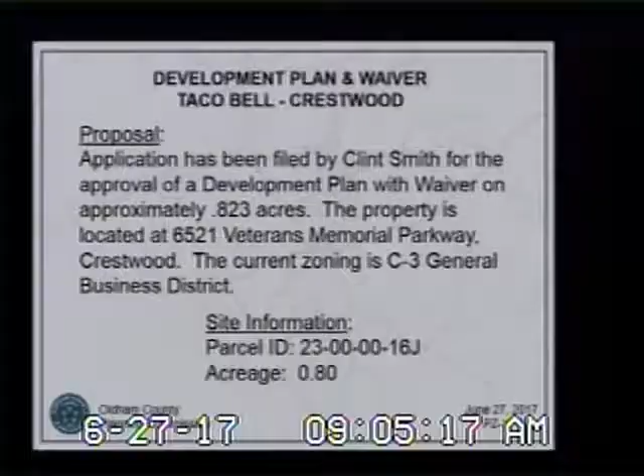I will. Good morning, Amy Alvey with Oldham County Planning and Development Services. As Ms. Fox stated, this is an application for a development plan with waiver on approximately .823 acres in Crestwood. This is an aerial photo of the property. This is the existing Walmart here. This is the existing medical facility that is there off of Veterans Memorial Parkway.

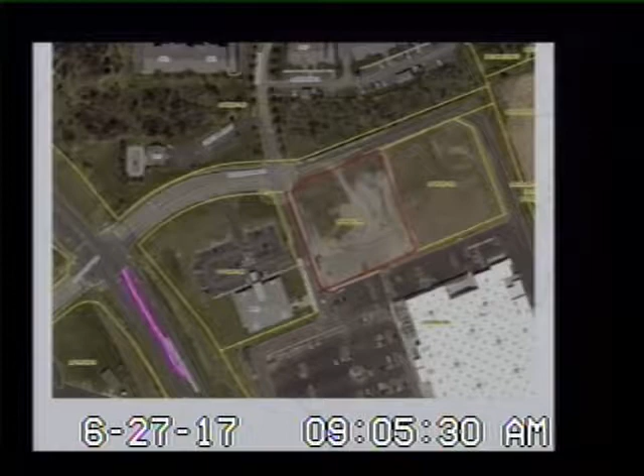History of this entire property. In November of 1989, the Planning Commission approved a zoning map amendment to C1, C2, C3, C4, as well as a preliminary subdivision plan for a development plan known as Cedar Springs, which included this site. That was docket number 1635.

Then in February of 2000, the Planning Commission approved a preliminary subdivision plan and development plan known as Oldham Farms, which also included this site, which was docket number 3126. Most recently, in February of 2014, the Planning Commission approved docket PZ 14-003.

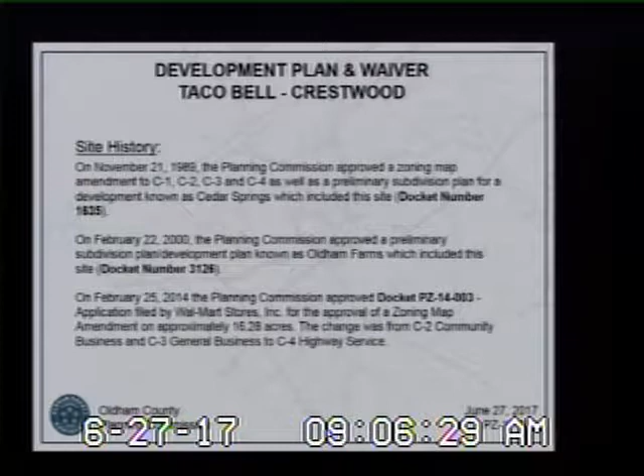This was an application by Walmart stores for the approval of a zoning map amendment on the 16.28 acres. And the change was from C2 Community Business and C3 General Business to C4 Highway Service District. That plan included the Walmart site and 2 outlots. And this docket is the subject of one of the outlots.

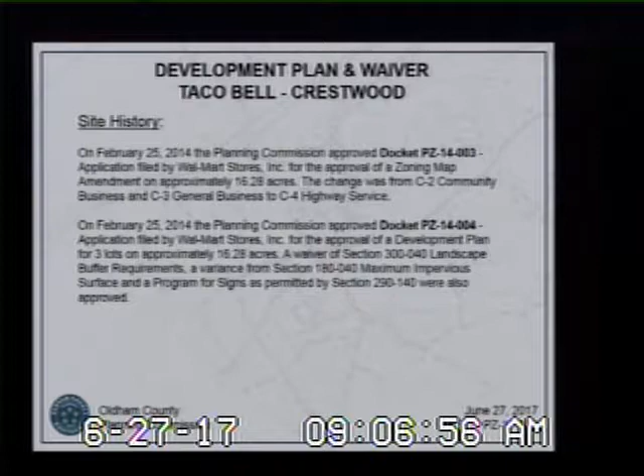Then on February 25th, the Planning Commission also approved the 3 lots on the 16.28 acres, and they approved a waiver, landscape buffer waiver, and a variance from the maximum impervious surface and a program for signs. That was all solely for the Walmart store, did not include the outlots. So this was the 2014 development plan.

Again, this is the Walmart location with their existing parking. These are the 2 subject outlots, and the outlot that we are talking about today is circled here, which is the Taco Bell site. Again, this is the 2014 development plan that just shows the location of the Taco Bell site there at the north.

And then there is a regional detention facility here, which is behind Camden Station and Kenwood Station Elementary, the South Oldham campus as we call it. And then there's also another regional detention facility that is located behind Arbor Ridge.

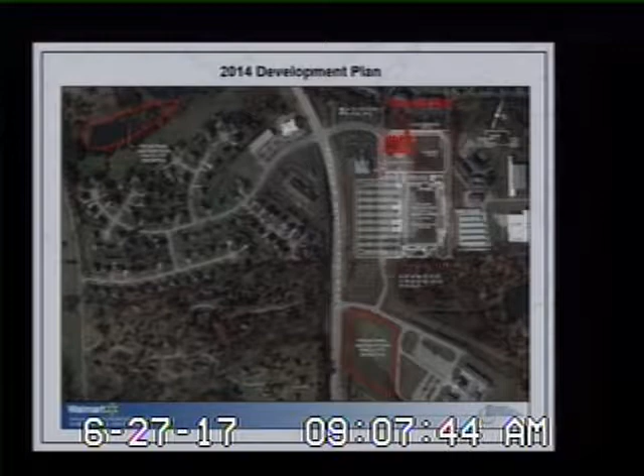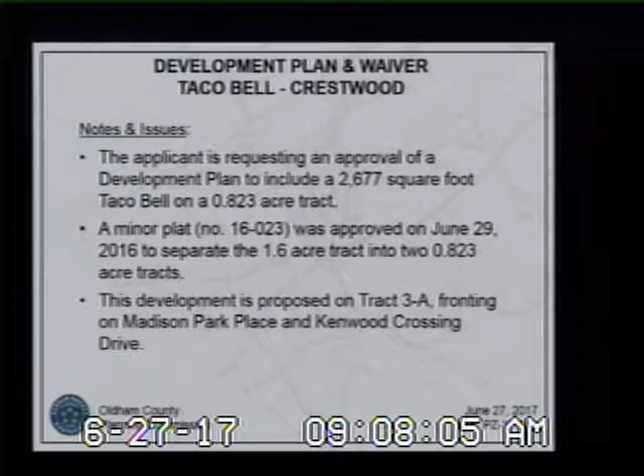The applicant is requesting approval of a development plan to include a 2,677 square foot Taco Bell on a .823 acre tract. A minor plat was approved on June 29th of 2016 to separate the 1.6 acre tract into 2 .823 tracts. This development is proposed on tract 3A, fronting on Madison Park Place and Kenwood Crossing Road. This is the minor plat.

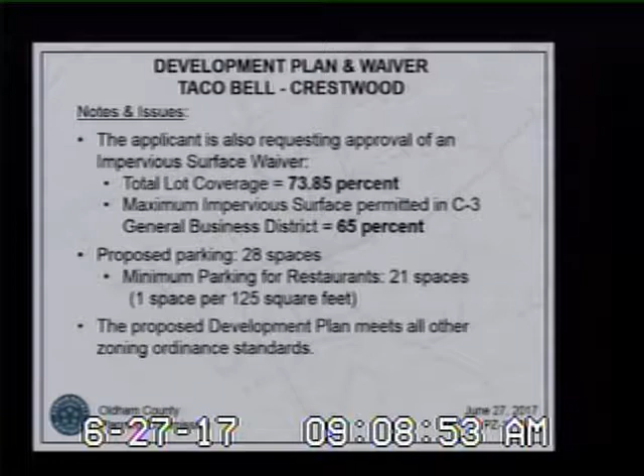The plan also outlines that they are showing 28 parking spaces. The minimum parking for the restaurant with drive-through facilities is 21 spaces, so they are above the minimum and below the maximum. And the proposed development plan meets all other zoning ordinance standards. This is the proposed development plan.

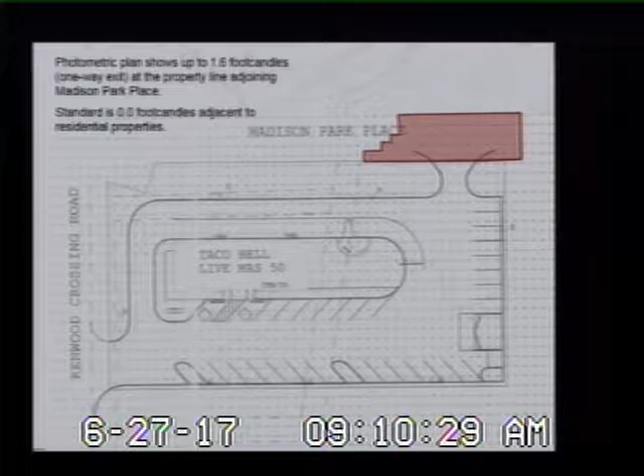The original photometric plan that was sent to you in your packets shows 1.6 foot candles at the one-way exit at the property line adjoining Madison Park Place. The standard is 0 foot candles adjacent to residential properties. The applicant has revised that plan, and they will go over that in their presentation. But they have decreased the foot candles from what was originally in Brooks' presentation.

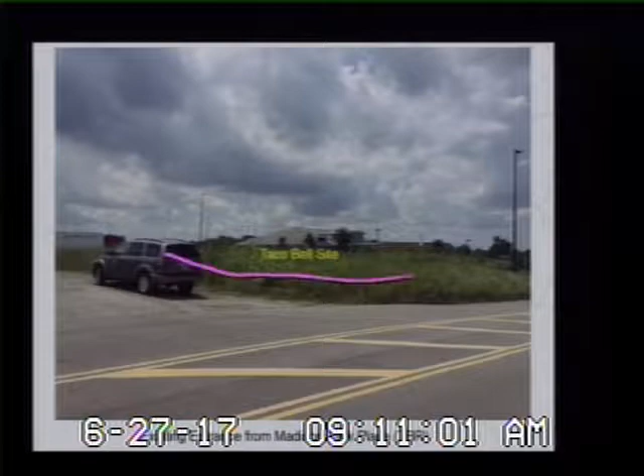This is the entrance into Madison Park Place that you're looking at. This is Madison Park, and then the entrance into Kenwood Crossing. This is another view. This is the entrance of Madison Park Place. This is the entrance from Madison Park Place, and the Taco Bell site is proposed there. This is the existing entrance from Madison Park Place.

This is the south view, looking towards tract 3B. So this would be the lot that would be behind Taco Bell into the Walmart parking area. This is the east view towards Baptist Health.

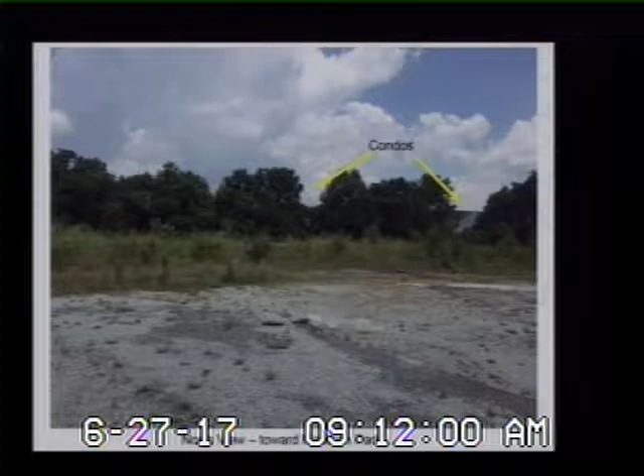And this is another east view. This is the west view, looking toward Outlot 2, which is vacant. And then this is the north view looking into Madison Park, and you can see a few of the tops of the condominiums there. This is just another north view, looking back into Madison Park condos.

So in summary, the applicant is requesting an impervious surface waiver. The maximum impervious surface is 65%. The proposed impervious surface is 73.85%. So they are requesting an 8.85% variance, waiver of the impervious surface area. And secondly, the applicant is requesting approval of the development plan to include a 2,677 square foot Taco Bell. That is all that I have.

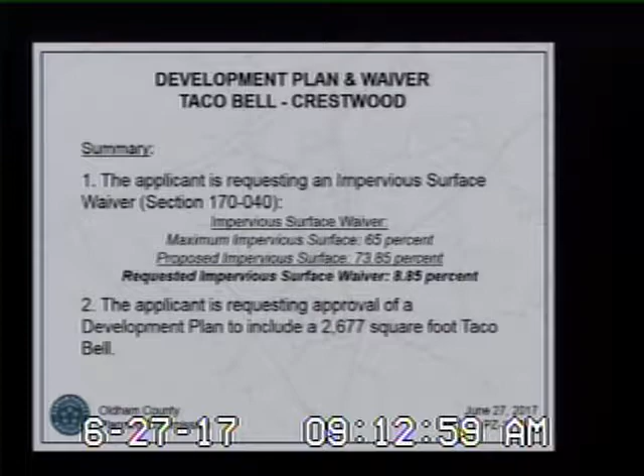All right, Ms. Albee, thank you very much. Commissioners, do you have questions for staff? Mr. McWilliams? Amy, would you go back to, I think it's close to the beginning, and throw that slide up on ingress, egress to include the drive-through? Yes, sir. Right here. You want the one with the arrows? Yeah, do your little drawing again.

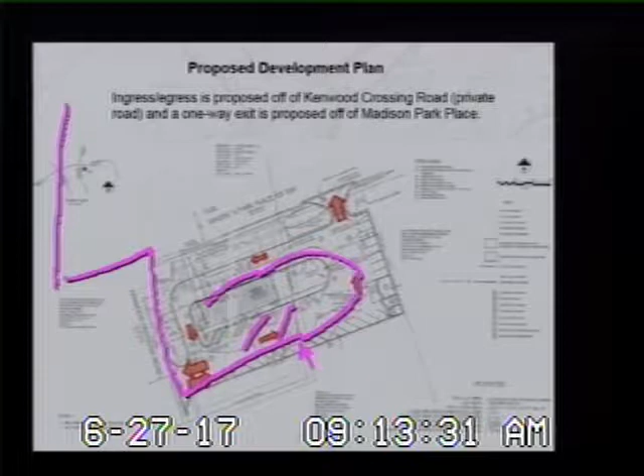Okay. So if you come in from Veterans Memorial Parkway here, you'll come in through Madison Park. You will turn on Kenwood Crossing, come in, go through. So obviously you can park here. You'll go around, go through the drive-through, pick up your food. Then you can either exit back out onto Kenwood Crossing, or when you get done with your drive-through order, you can go back around and exit out on Madison Park. This will be an exit only. Thank you. You're welcome.

All right. Any additional questions? Mr. Horton? Thank you. If this is the inappropriate time to ask this, let me know, but I'm directing it to staff. There were an awful lot of questions and a lot of concerns in the TRC. Have they met those, or have they addressed those sufficiently? I'll let Jim answer that. This is actually Brooks' case. Yeah, so I was not involved in that. I think it's up to the applicant to answer those questions; we'll call Scott up, the county engineer, related to some of the drainage issues, but other than that, it's up to the applicant. Okay, thank you, Mr. Chairman. Any additional questions for staff?

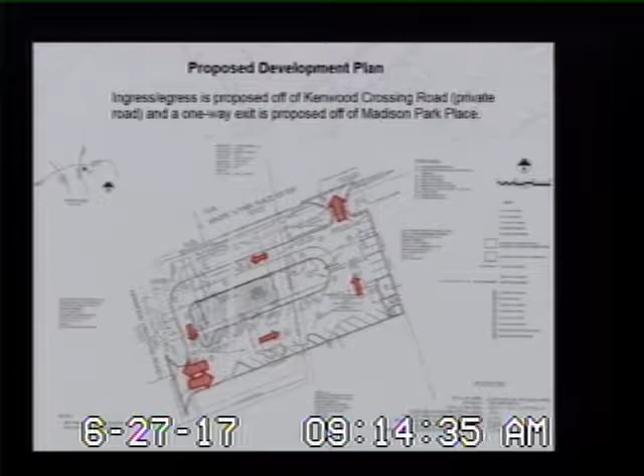Yes, Mrs. Smith. Can you show me where the proposed training center for Walmart that's been approved was going to be? This area here. I thought it was more back. And it's actually under construction. Thank you. All right. Any additional questions for staff? Mr. Douglas. I'm sorry. Let me get Mr. Finney, and then I'll get Mr. Douglas.

On that map right there, run that entrance and exit again, what you had showed if they were going into the drive-through. Okay, this is the original development plan for the Walmart. So you would come in off Veterans Memorial. You will come in this way. You can park here and here, in the regular parking. You'll loop around the building through the drive-through, and then you will be able to either exit back out onto Kenwood Crossing, or you can loop around and exit out on Madison Park. Okay, so you actually come in on Madison Park. Well, Madison Park is the entrance off of Veterans Memorial. Right, Madison Park comes in, and then you go to Kenwood. Yes, sir. Okay, I got it. Mr. Douglas?

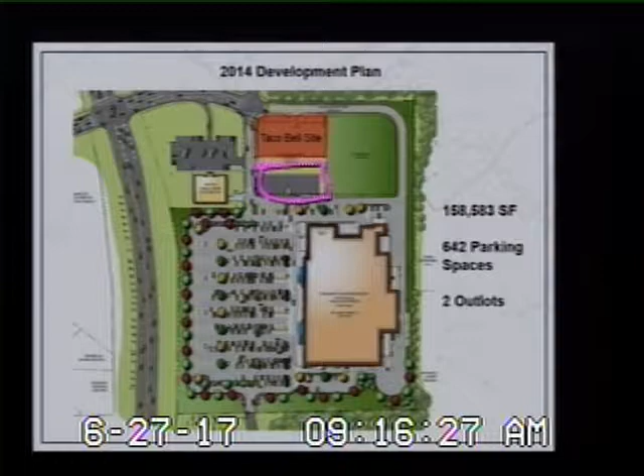Yes. Amy, I'm not sure if you will answer this or Mr. Harris. Sure. Based on that diagram, you see Taco Bell up there. Then you have the other outlot, the out parcel, which is right behind it. Correct. What would be delineated, or what would we see as the divider between those two properties, because that's impervious surface there? Is it going to be like a curb going across there, or something else? That's probably more of a question for the applicant. Okay. They'll be able to tell you what that is. Okay, I'm assuming it will be a curb. Next question will be for Mr. Harris then. Mr. Harris, come up if you would.

Well, any other questions? Did you get sworn in a while ago, sir? No. Okay. Ms. Fox? Do you solemnly swear to tell the truth, the whole truth, and nothing but the truth? I do.

All right, Mr. Douglas? Morning. Good morning. You don't sound very good. There's a little bit of pressure upstairs. Okay.

This is under 1 acre. So will they have to propose a stormwater quality management plan? They've actually gone above and beyond anything required. You hear a lot of testimony in all these cases about, we met the requirements, we met the requirements. Everybody else always says that they met the minimum requirements. These people have already done drainage calculations and sent me a stormwater plan, which is way early in the process. They are not, to answer your question, required to have detention or water quality, yet they have both.

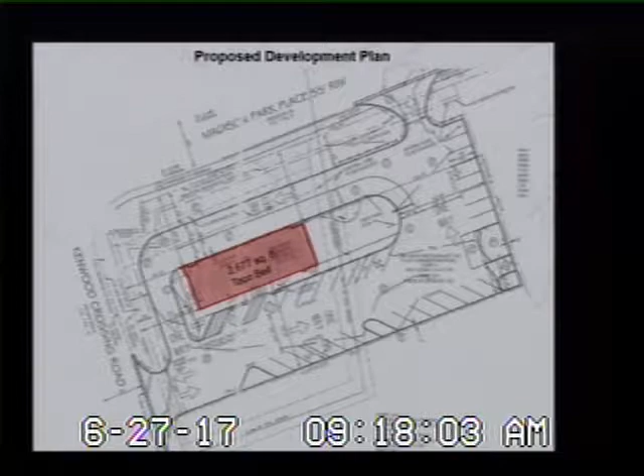Okay. During your conversations with them, was there any conversation about disturbing the other outlying lot to develop this particular lot? No, well, there were a few discussions about sharing an entrance. There were a few discussions about possibly sharing parking. Until you know what's going to happen on the lot next door, those are really kind of moot questions. And they aren't doing any development on that other parcel. They don't own it either. So the next people that come in are gonna have to do that. They seem to be very open to sharing with whoever would come in. Okay, thank you. All right, any additional questions for staff?

Okay, seeing none, we'll now move into the presentation by the applicant and/or representatives and others in support of the application. You have 50 minutes, and Mr. Applegate, I would assume you will be presenting. And I think we kind of had a little swearing in when we started, but let's officially get the folks that will be testifying sworn in. Ms. Fox? Do you solemnly swear to tell the truth, the whole truth, and nothing but the truth? I do. And Mr. Applegate, we just need your name and address for the record, please. Alan Applegate with Applegate Fifer Pulliam at 428 Meigs Avenue in Jeffersonville, Indiana. So I'm sworn in with that address.

Okay. But we've represented C&M Smith restaurants on several of their Taco Bells. And Mr. Clint Smith is the owner of C&M Restaurants, Inc., who is here and was just sworn in, as well as Nathan Grimes, the owner of the applicant's architect and engineering firm, Renaissance Design Build, Inc. So we have, I think, all the parties to the application.

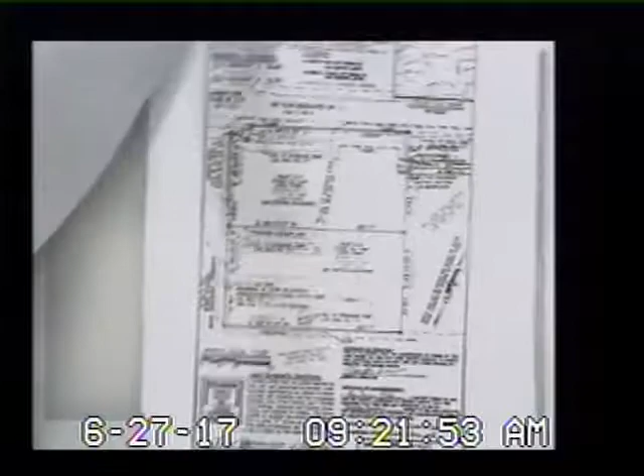One of the notes that you had asked about from the TRC, the minor subdivision plat has been recorded. There is the file stamp on the deed with the minor subdivision plat. Again, that was one of the items in that May 11th post-TRC meeting, and evidence that the minor plat has been recorded. We're going to need anything that you show us. I'll just hand you the package. That'd be fine. We believe that we've addressed all of those matters. If you want me to go through them line item by line item, I will.

Obviously, the minor plat's recorded. The address is a notation, not a requirement. Parcel number was added to the plans, and presumably the PVA will split it now with the minor subdivision plat, but it will emanate from that key number. The development plans, and all the plans submitted to date, do include the information required or requested in items 4, as well as 5, 6.

We will also be constructing a sidewalk along the exterior of our lot that's handicapped accessible, et cetera. The parking spot on the left side of the handicap parking, you won't see that in your current plan because it was removed. We've got a typical parking stall note. All of the table items are indicated.

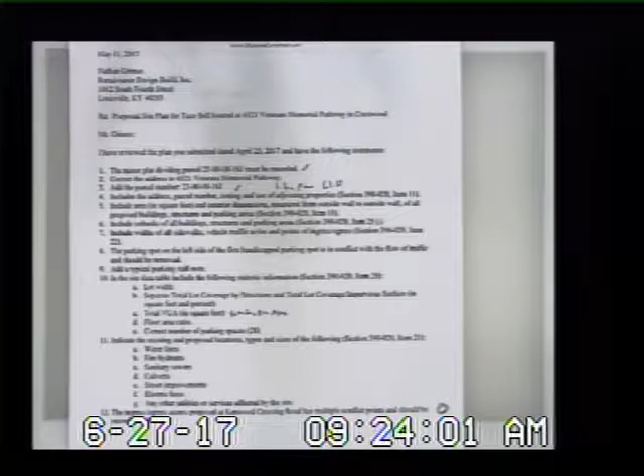And the ingress access points proposed at Kenwood Crossing, I'm sorry, we had talked about a shared entrance off of Kenwood with the other 0.86 acre lot. Planning and development thought that it would be better not to have that shared access, so the plan has been revised to indicate single access for this site only. Land contours, elevations, I believe Mr. Grimes has indicated those on his plans.

The existing drainage easement in conflict with the VUA, the removal and relocation of this easement, I will let Mr. Grimes speak to that. I believe that that easement probably stays underneath the parking, but I'm going out on a limb by saying that. So I will let Mr. Grimes speak to that item.

The sign, landscape buffer, and I believe that we do have a landscape buffer, but I believe that the landscape plan, we've tendered a preliminary one, and under the staff report, a final plan would need to be tendered prior to building permit. Not sure that we've got a final plan tendered and approved. We have tendered a landscape plan. Lighting plan, we talked about that in the initial presentation. The last one's the filing deadline, so I'll take that back off.

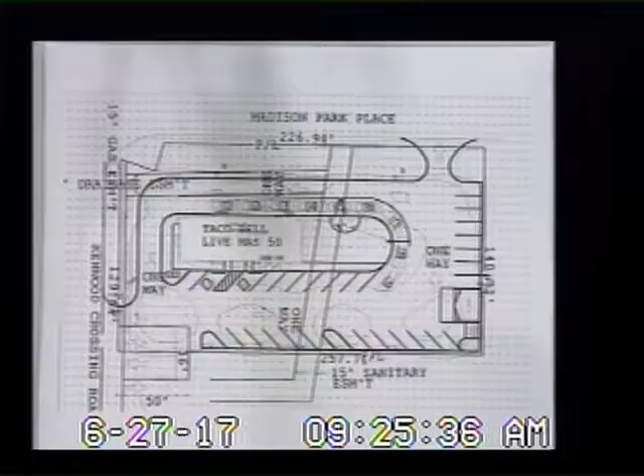The revised lighting plan. I'm sure you can read all those microscopic numbers, but they have been emailed to staff, and it does meet your ordinance in regards to the bleeding of light off of our property line. It did not show it initially because the lighting company thought it would be better to have an exterior exit light and a little bit better lighting as it got on to Madison Park Place. That is why we didn't show it as 0 foot candles on the boundary.

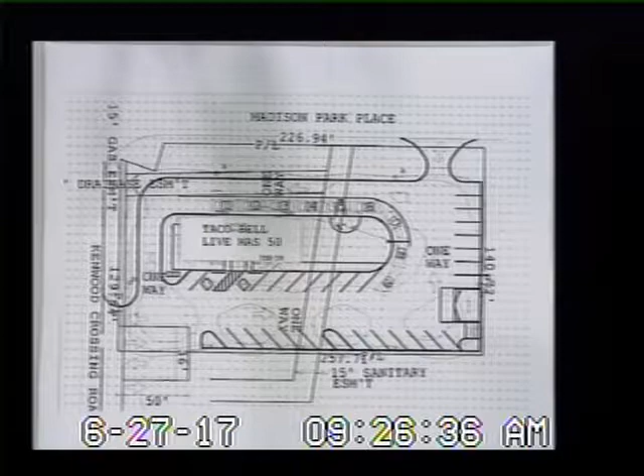We've told them that, well, that's not what the planning department wants, but I would note that with Madison Park Place, on the other side of that is a creek and a heavily wooded area. I think you could see it in your pictures. You could see elements of condominium projects across the street, but on that side of the Madison Park, you've got the roadway, creek, heavily wooded area. I mentioned that sidewalks are shown on the plan or will be constructed.

As to the impervious surface waiver, I perceive in my practice the impervious rule is a stormwater control matter, as well as some landscaping. Those are the benefits that those rules are intended to effect. In this case, C&M intends to store or detain water from the site into an underground piping system and then release that at a reduced flow underneath that exits into Madison Park Place into, I believe, the creek situated on the other side of Madison Park Place. It's basically 3 24-inch pipes that are 150 foot long.

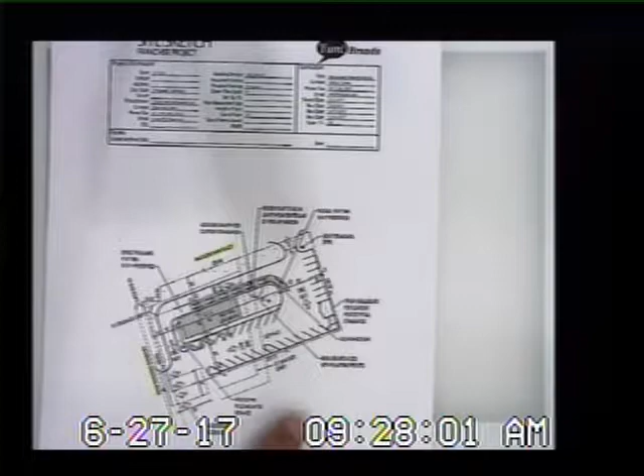Now let me do a site sketch instead. Those pipes will be running in this area and exiting in this area to the creek on the other side. So water will be captured and then slowly released off of the property. As a result, we believe that the design will allow this property, even with the waiver, to meet the basic objective of the maximum impervious surface standard. And we believe that the engineering will not be injurious to the public health, safety, and welfare of this area.

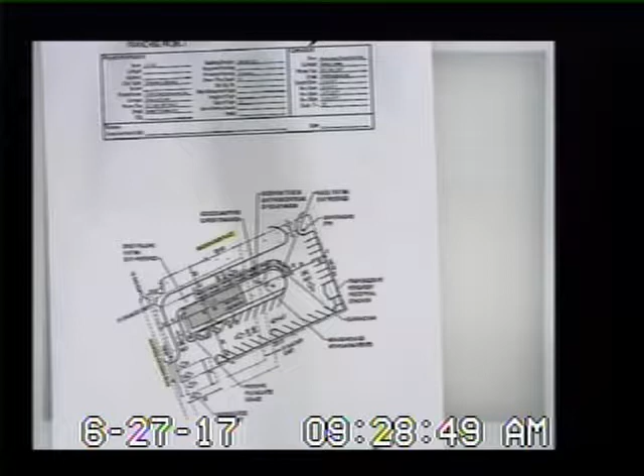I would now like to introduce Mr. Smith, who would like to talk a little bit about his business, some of the architectural details, and then followed by Mr. Grimes, who will make himself available to discuss the drainage and other engineering particulars that you had. I hope that I've responded to your question, and thank you very much. Thank you, sir. I guess we'll just need to get your name and address for the record, please.

Good morning. My name is Clinton Smith. I'm the franchise owner, CEO of C&M Smith Restaurants. I reside at 5140 Charlestown Road, New Albany, Indiana. I've been a franchise owner for 29 years. In fact, I was a young man when I started, so I should point that out.

Our company, we own and operate 20 Taco Bell locations. We have 13 in Indiana. We have 7 in Kentucky. Taco Bell has very high standards for food quality, cleanliness, and customer service. We currently own, as you know, a Taco Bell in Crestwood. However, we are looking to move to a new location. Our current location is too small, as well as it has poor visibility from Highway 146.

As you've heard this morning, we have an option to purchase land and an out parcel near the Walmart and closer to Interstate 71 traffic, which we think will help our business. We plan to build a bigger and better Taco Bell with the most current prototype Taco Bell image. The new restaurant will have better visibility, more parking, improved drive-through experience, and an escape lane for customer and our traffic.

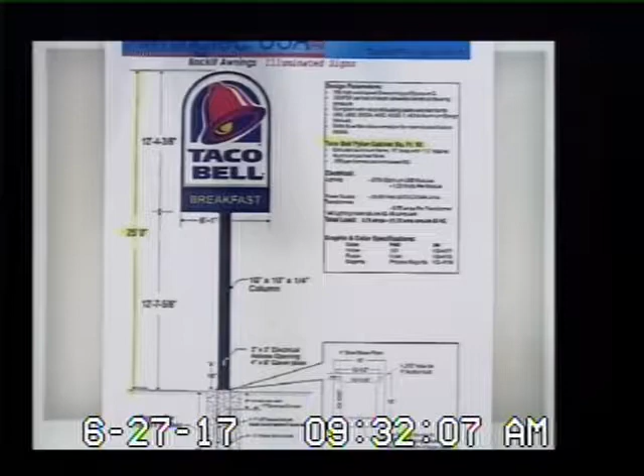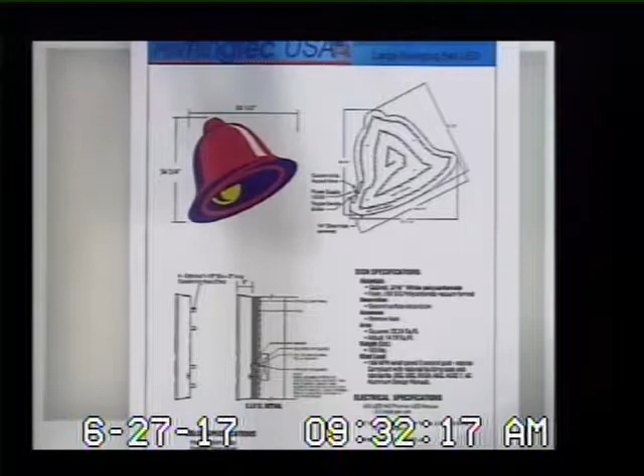Here are some other pictures of our building logo there. And that's just a picture of the Taco Bell signs on the building itself. I think the other thing that I'd like to do, take those. I know the site plan, she did a really good job of going over that, but as you can see, the main entrance will be off of the Kenwood Crossing Road with one-way traffic getting in.

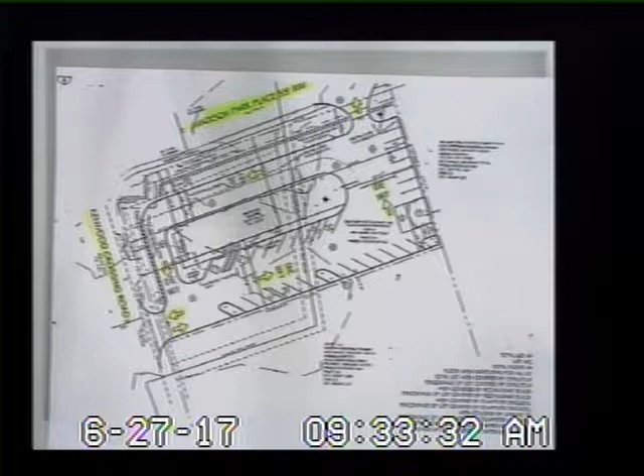You can see that the position of the building is facing to the west, with the drive-through flow on the north side of the property, and there is an exit in the back for exit only. I think the escape lane provides a feature for a customer who perhaps might get in the drive-through and decide that they want to come in and see the great-looking dining room that we have, so they can circle around and come and park and get inside the restaurant that way. So that's a layout of the facility itself.

At this time, I will turn it over to Nathan Grimes. He is my architect, and he can talk about the technical features of the Taco Bell restaurant. But I want to thank you for your time this morning. Thank you, sir. And Mr. Grimes, again, name and address, please. Nathan Grimes with Renaissance Design Build. 1012 South 4th Street, Louisville, Kentucky is the address of our Louisville office. And here representing Clinton Smith with the Taco Bell restaurant.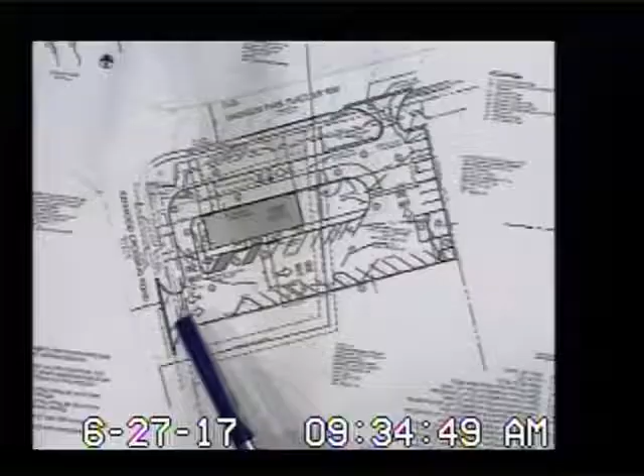I'll just review a couple things, and I think I can answer a couple questions that were presented, and then we'll open it up for comments or questions you may have. I think, once again, staff has done a very good job reviewing this. One of the questions was, I want to clarify, there is an existing entrance to this site located on the adjoiner, so we will have a separate entrance onto Kenwood Crossing Road. Just want to make that clear. The existing entrance that was shown is about right here, so it's not even on our property. So just so everybody understands that.

Also, we are going to do a concrete curb all along the front and the back, and we'll be about a foot off. I think we're a foot off this side and 2 foot off the back, so that's how we're addressing that issue with the adjoiners, and it'll probably be sod for that foot to our property or 2 foot to the back.

So the question about the reason for the waiver: it's a very tight site that we're requesting, and we're 8% under the requirement, and we would actually have to have a green space bigger than our building to make that work on our site. So it's just not feasible for us to meet that. We have actually added some landscape islands and some things the best we could, but due to what we need on our property, we really can't meet that constraint. So that's the reason for the request.

The next page is what we're doing with drainage. We are tapping into the existing drainage. We'll have several catch basins in our parking lot. It looks like we've got 4 of them. The last one is the one that takes care of the first flush issues, oils and stuff on site. And then here we're having 3 24-inch pipes that contain and detain the runoff so that the pre and post are the same on our site.

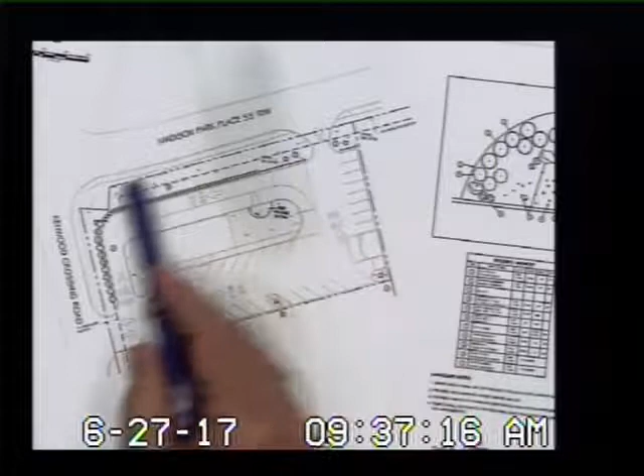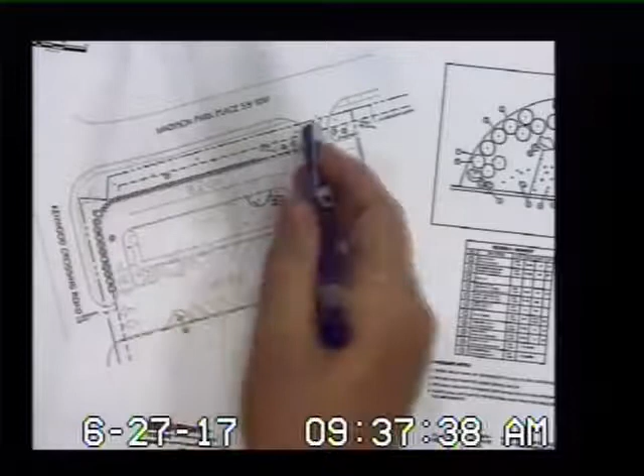This is kind of the landscape plan, what we were presenting, and we have shown a 10-foot landscape buffer here on the site, but we're actually putting our landscaping not in that buffer, but next to our curb and gutter on Madison Park Place, because that's actually 4 or 5 feet higher. If we put our landscaping in this landscape buffer, it's not going to do anything to shield our site and lighting and stuff like that.

So it's not exactly meeting the requirements of the landscaping, because our landscaping will be outside the landscape buffer, but I think it actually meets the intent of your ordinance better by doing that. So there'll be a row of bushes and shrubs along there. We're actually putting a fence here on this back entrance so that people turning into the drive-through lane, it kind of deflects that from the neighbors across the street.

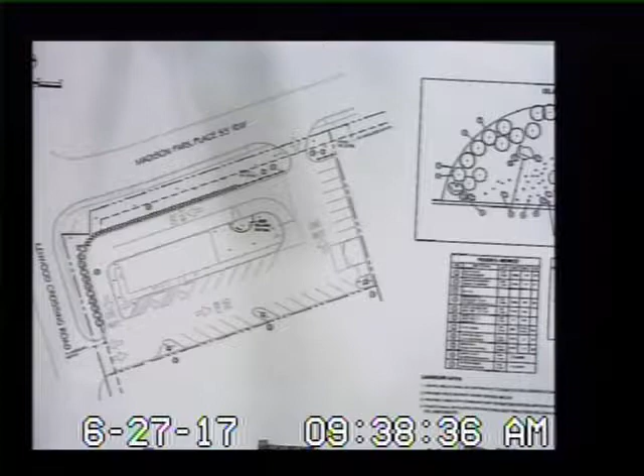So that's kind of how we're approaching this, and we'll present this final plan for approval by staff prior to construction. We can put those bushes in the landscape buffer, but it won't shield the parking lot and lights as well as what we're doing now. But we'll work with staff on that. And I don't know if you have any questions about that or not. And we'll open it up here in a little bit for questions. Sure.

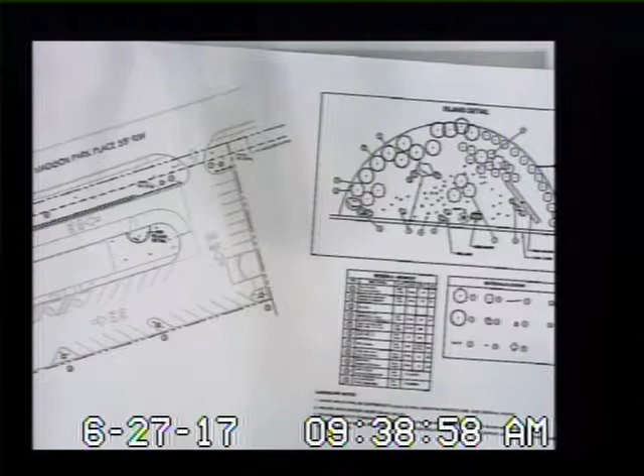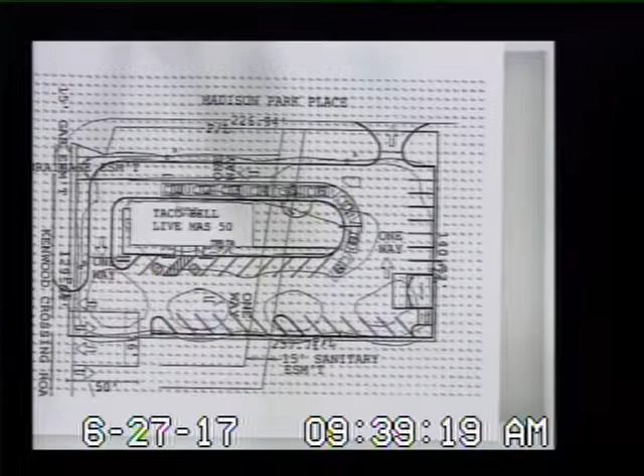And this is all the landscaping that goes behind their kiosk for the ordering at the drive-through. So that's what this is here. That's a typical Taco Bell thing that you want to see at that landscaping. And we've got a revised lighting plan. So it is 0 here where the concern was at this entrance. Clint's lighting manufacturer did that for us. So I think that addresses all the concerns.

If you have any other technical questions for me, I'll be happy to try and answer them, or any concerns or issues. I'll just put the development plan back on there in case you have any questions. Okay, we'll have some, I'm sure, in a little bit. Thank you. Yes, sir. All right, Mr. Applegate, does that complete your presentation?

Yes, sir. I think the materials presented indicate that we meet the requirements of your zoning ordinance, which is the purpose of a development plan request, other than the impervious area, and we have provided some engineering and other techniques to alleviate not meeting that requirement. We've done some engineering to offset the purpose for the requirement, and we believe that it will not be detrimental to the county or the town. With that, we will conclude our presentation. Okay, thank you very much, sir.

And with that, is there anyone here that would like to speak in support of this application? All right, seeing no one, we will now move into testimony and questions by those opposing the application. Is there anyone here that would like to provide testimony in opposition to this application? All right, I see no one getting up. So with that, commissioners, we'll open it up for questions. Do you have any questions for the applicant? Mr. McWilliams.

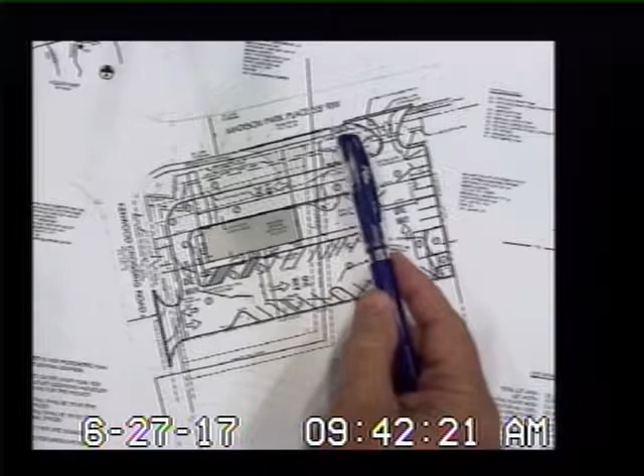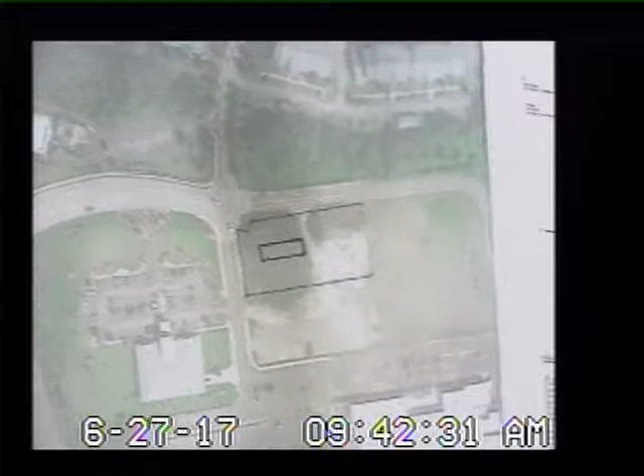We will have signage here that says out only. Obviously, someone can do whatever they want to do. And I have this restricted down where it's only really one lane, so it's only 15 foot wide. Will there be any signage at Kenwood of any type? I mean, we've got one way here. There will be entrance signs on Kenwood, yes. Taco Bell has those little signs you see at the entrance that say enter here. So they will be out on Kenwood Drive at the entrance. All right, that takes care of it for most people.

But Clint has this issue many times where it's only one way around the side and people back up and go the wrong way on the drive-through lane. So that has happened. People get confused. If they're new to the site, they don't know exactly how to go, not paying attention to the signs. But historically, that's not been a major issue. Historically, it's not too big an issue, but I'm not saying someone will not enter. I guarantee you the first week or two that will happen, but I don't know how to restrict that other than signage.

Well, and that's why we require a pass-through lane, so if they did come in there, they would not be bumping up against cars waiting in queue or trying to get shuffled around; they can pass right. So I think we try to address it best we can. No, you did. I just wanted sort of a historical perspective. Well, Clint can speak to that. I have seen where that has happened, where people run through the wrong drive. You're good, I'm satisfied, thank you.

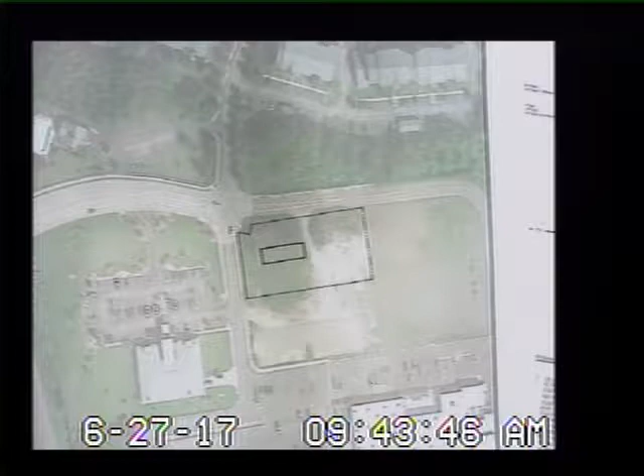I mean, the site plan will have directionals even for the drive-through. The drive-through will have exit. We've had people in the past that have tried to go in the back way in the drive-through, and it's clearly marked, not only on the pavement, but with directional signs. So that's a real difficult one to try to manage. I don't know if that answers your question. Yes, sir, I'm satisfied. Thank you.

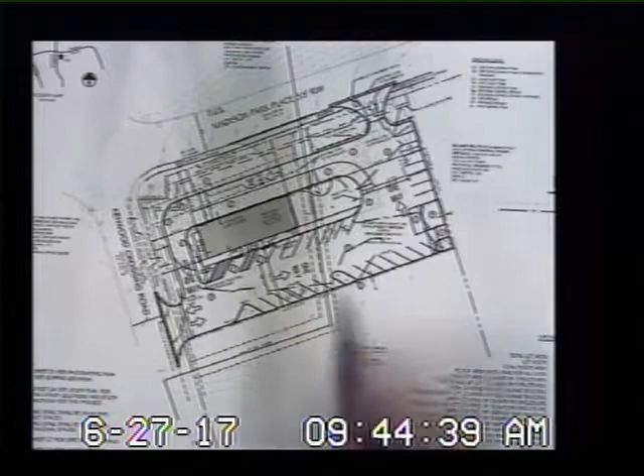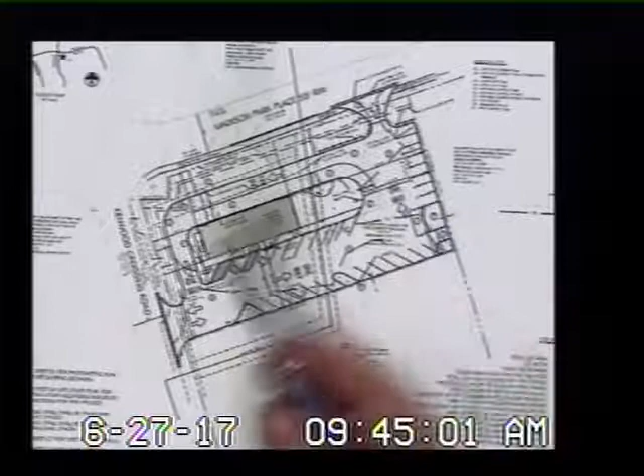Thank you. All right, I've had Mr. Horton down for questions. Thank you, Mr. Chairman. There seems to be a little difference between our plans here and one of the ones you showed. Would you outline exactly where the ordering kiosk would be and where the drive-in service window would be? Sure. The kiosk ordering is that little half circle right there. That's where you order. And there's a bar that goes up and across, kind of the entrance to the drive-through, which is right there. And the pickup window is about halfway down the building.

So we have an 8-car stack in our drive-through lane, which is a requirement of Taco Bell, 7 to 8 cars, so we're actually more than the minimum for this site. Thank you. That answers it. Thank you, Mr. Chairman. Okay, Mr. Douglas. Is your mic on, sir? Can you hear me now? Yeah.

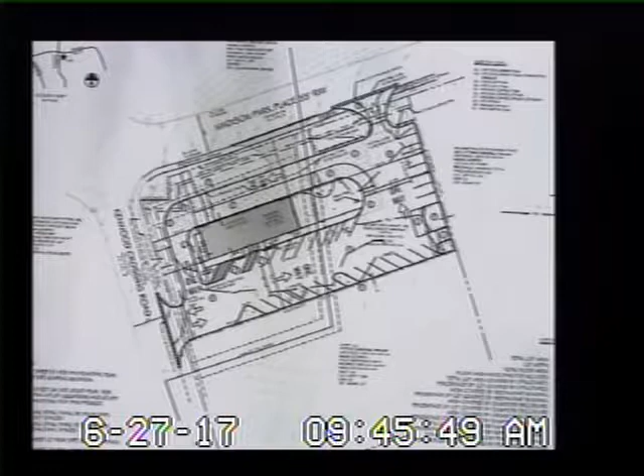You mentioned that there will be 24-inch drain pipes for the stormwater. That's for the detention. The regular pipes are 12-inch pipes, but for the detention there are three 24-inch pipes put side by side. And would you explain to us the collection of that water, that there'll be enough in case there's grease runoff or something like that? Because you're saying you're going to slowly leak that into the stream across the street or into the existing basin already there on the complex. Yes.

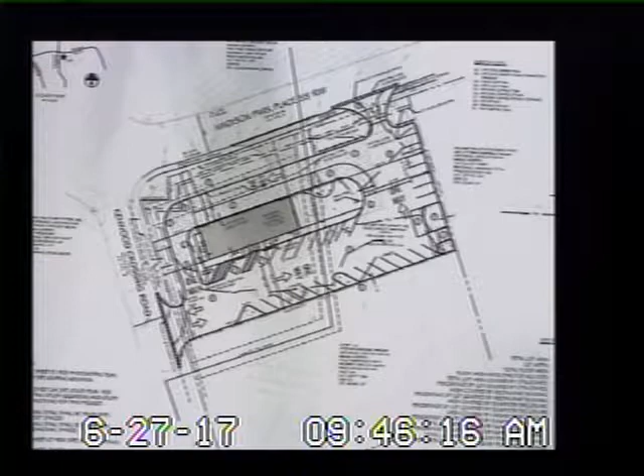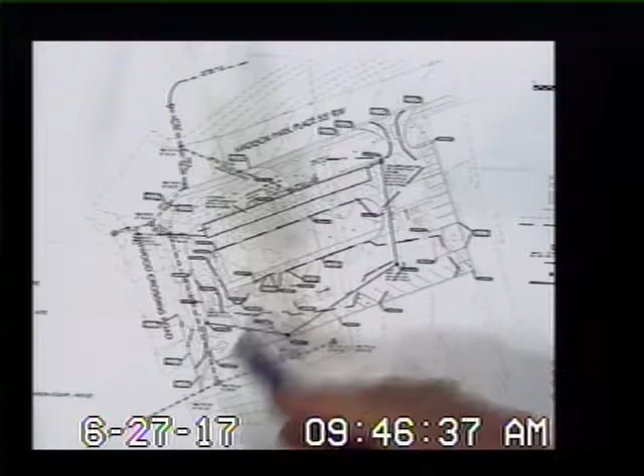Let me get back to that drawing. Yeah. So those pipes are basically in the pass-through lanes where we're putting those three 24-inch pipes. Before you get to that, we're putting what's called a water quality unit, First Defense FD-4HC or equal, which is a proprietary unit. It's actually a flume that the water goes through and the sediments drop out to the bottom.

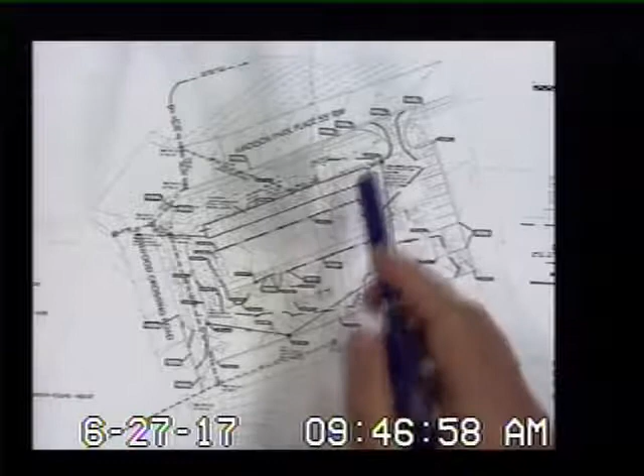So what you proposed in the TRC is what you're planning on doing? Actually, we have revised that after TRC; we're using a different unit. What was presented to Scott afterwards is a different system, yes. He did not like the half things, so we're putting in pipes, not the chambers. Correct. And who's going to maintain that basin? Do you have an agreement with Walmart? It'll be Clint's responsibility to maintain it as the property owner. Everything's contained on his site. Okay.

Would they be willing to put that in a binding element or an agreement? I know we're working on a maintenance agreement now. Well, they have to because it's on their property. Right, and I don't know that that's necessary. It'll be their unit, and it's similar to the grease trap that comes out of his pipe. Saw that. So he has to maintain that as well. Those two elements are just part of the maintenance upkeep of the building for Clint. Okay. And he's familiar with that because he has those type systems on all his other restaurants. It's a code.

You gotta come up, sir. On the grease trap, we actually have a private vendor that comes four times a year and cleans and pumps out that grease trap. And they check it for the amount of grease that's collecting in there, so it's done often. Okay.

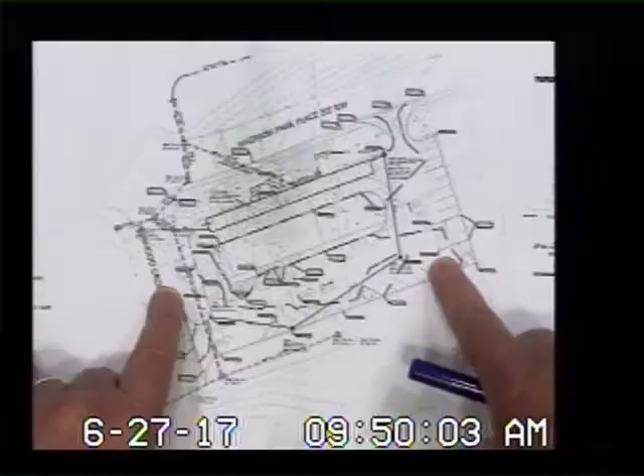This will be my final question. The impervious surface that you were talking about, I know it's a small percentage because it's a small lot. Did you consider meeting those requirements when the design was first being proposed? Yeah. And how many spaces would you have to give up to meet that? Are you talking about losing one parking space, two parking spaces? No, this is the area of my building. I need an area bigger than that, so I would be losing this whole row across the back, all those parking spaces, basically to meet that requirement.

And was it decided during negotiations of purchasing this property, and you don't have to get into that, but could you have purchased a larger amount of the property that was offered to meet the impervious requirement? That's not what the minor plat had. I'm not saying you couldn't buy a 10-foot strip from somebody else, but that's apparently not available. Okay.

A couple of comments. I believe that the negotiation to purchase the ground was well before the development plan. The minor plat was approved almost 11 and a half months ago, that just went of record. So I think the parties went in with the understanding, we split 3 into 3A, 2 equal parts. They're exactly equal in size, north and south lot.

I think at the first TRC meetings, technical review meetings, I'm not sure that we were aware of the pass-through, drive-through lane. If that was not there, we could meet your impervious requirements. But now we have a pass-through, drive-through lane, which is taking up, in essence, that amount of impervious surface, it's eating into our 65% and pushing us into the 73. As an offset to that, this on-site underground storm pipe detention emanated from that. We have gone up over and beyond according to the county engineer, but that's because of this waiver request.

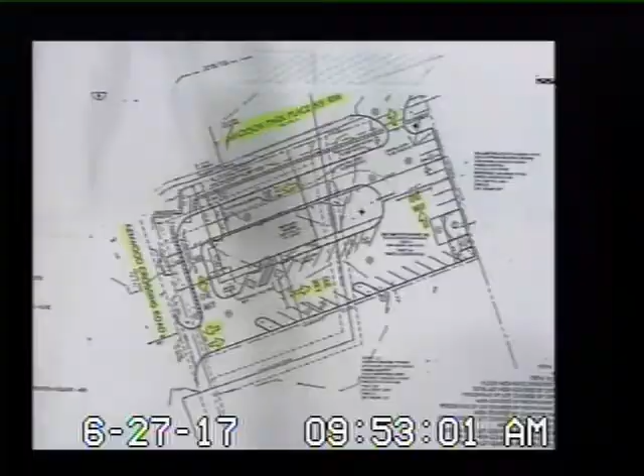Well, and they are detaining it in pipes. They're compensating for the hard surface by putting underground pipe for detention. And I always say this, for the commission members' consideration, our regulations are written as if every property has adequate space and flat surface and is easy to develop. And that's why waivers and variances are part of KRS 100, that you can request these for your consideration, and it's up to you to decide if it's appropriate or not.

But in the case of a development plan not being able to meet it, KRS 100 and our regulations allow for waiver and variance requests. So whether or not they've justified it is up to you. I think if you had waited until I finished, I think you're going into something that I wasn't even going to go into.

Okay. But what I was trying to get at is that I thought that he's already explained the collection of that. And what I was trying to emphasize is that I believe that they're meeting or exceeding, based on our engineer already coming up here, those expectations and beyond for that waiver. So I was just putting an emphasis on, that's what I'm looking for for that waiver. And I think that's what our engineer has stated, and I trust our engineer to provide that. If you had just let me finish that, I would have.

Okay, does that finish your question, sir? That finishes it. All right. I've got one more thing to say regarding that. There are other things that come into play for Clint, and Taco Bell has parking requirements as well that actually exceed the city's requirements. So if we eliminate those, then it doesn't meet Taco Bell's criteria for his site. So there are other issues that are coming into play. All right, let's move on to Mr. Finney. Had you down for a question?

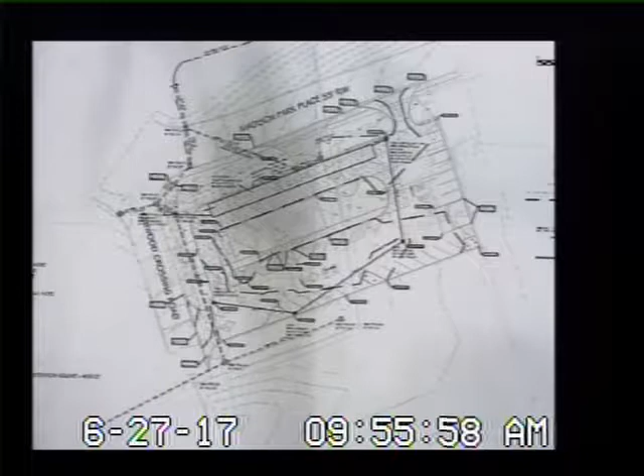It is restricted. In other words, I've got 3 24-inch pipes, but the outlet is manifolded together and it's restricted as it comes out by a weir, basically. A weir, like a V weir or something, is what restricts it in that manifold process. So there's not 3 24-inch pipes that come out. It goes to the manifold and it's restricted down before it goes to your existing inlet here. Is that discharge above ground or below ground? It is below ground into your existing catch basin that's already there.

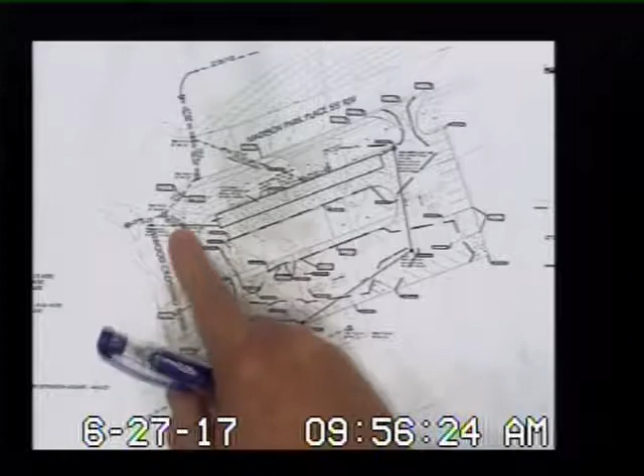So there's an existing inlet right here at the corner of Kenwood and Madison. There's actually three at that corner: one, two, three. So it is manifolded down and it goes into your existing collection system that's there now. But that discharge is discharged into either a concrete or riprap basin or something like that? It is a concrete catch basin inlet, yes. But that part of it is actually open? It is not being discharged into gravel. No, it's covered, discharged underground. It's not open discharge. My concern is what keeps it from being stopped up.

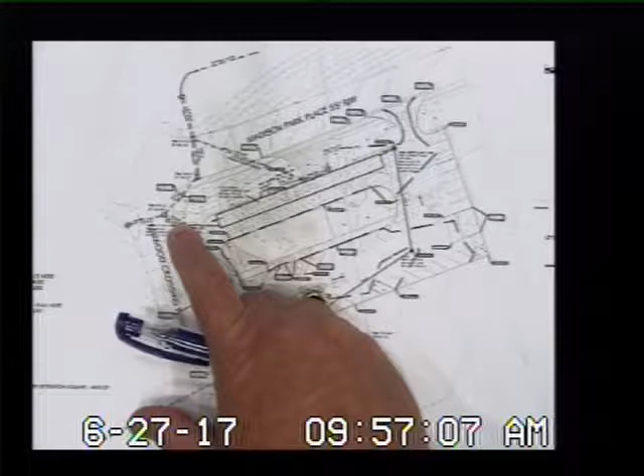You've got a choked system, in other words, to control the discharge so that you're not releasing the full volume of the pipes at one time. Correct. So you've decreased the discharge opening. Correct. There are normal trash things that are going to get on a parking lot. They'll get into this in a rain. What prevents that? That actually gets collected back here at this proprietary unit prior to going into the detention. So you said the detention water will always be clean? Yes, sir. Okay.

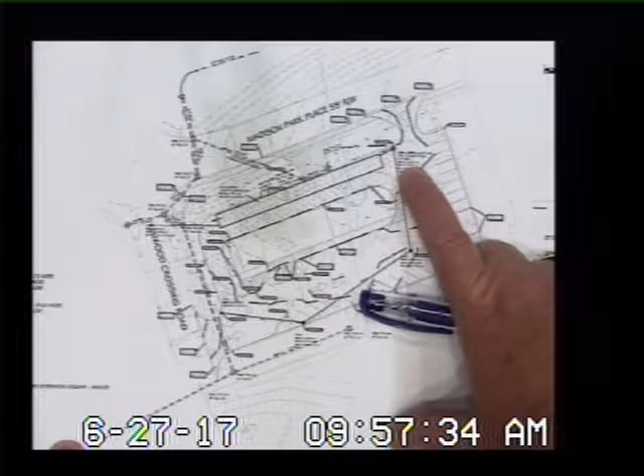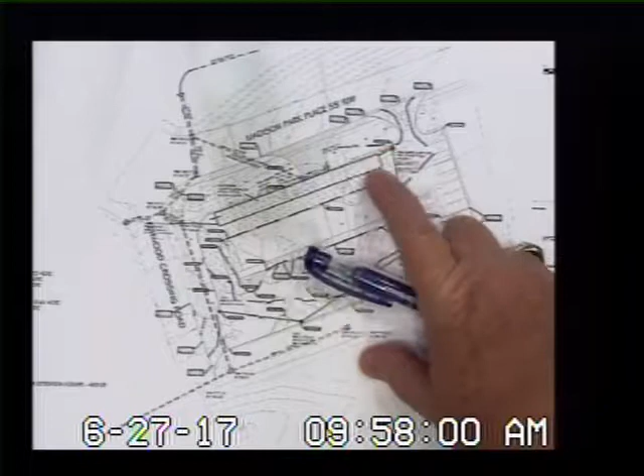This unit actually has a sump in it, basically, that all that collects in, that he has to keep clean. But a sump won't catch paper floating. Well, I know, but it goes down into, the intent of this proprietary unit, and I didn't design it, I've spec'd them, but that all falls to this sump, and whatever is in the detention is actually just clean water, to answer your question. Okay, thank you. All right, Ms. Smith.

Could you have designed a restaurant where you would not have had to ask for a waiver, considering the constraints of the property? Not on this site, no, ma'am. Really? Mr. Urban? Well, Ms. Smith, if you remember, our regulations require a pass-through lane. The applicant presented pictures of a store in Salem that did not have that. If they didn't have to have their pass-through lane, they could meet the requirements of impervious area. That was part of their testimony already.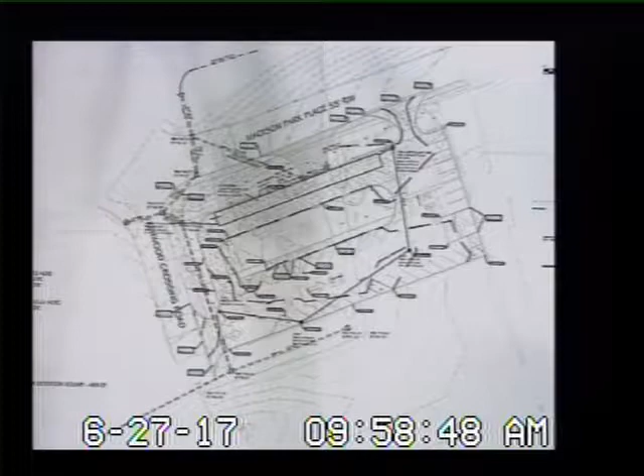Yeah, so I guess we could have asked for a waiver to not have the pass-through lane as well. I don't know if that'd be a waiver; an alternate would be to not have the pass-through lane on the site, and then we can meet the impervious. In working with us, staff felt that it was better to have a pass-through lane than meet the impervious area, especially since they're putting in underground detention. All right.

Well, my main question was about the lighting. Does Taco Bell require certain lumens for the lighting? I'm worried about the spillover lighting into Madison Park. We have redesigned that where it is zero at the property line, so that issue is taken care of. And since they did not present a signage package, will our rules and regulations take care of that? Most Taco Bells, you could land a small plane. They're so bright in the middle of the night, and I just don't want that to be next to a residential area.

Well, I think they've testified this morning that they are having 0% light spillover off the property site. So that's what they've testified to. All right, yeah, thank you. That's along Madison Park Place, which the residential is adjacent to across the street. All right, Ms. Crosby.

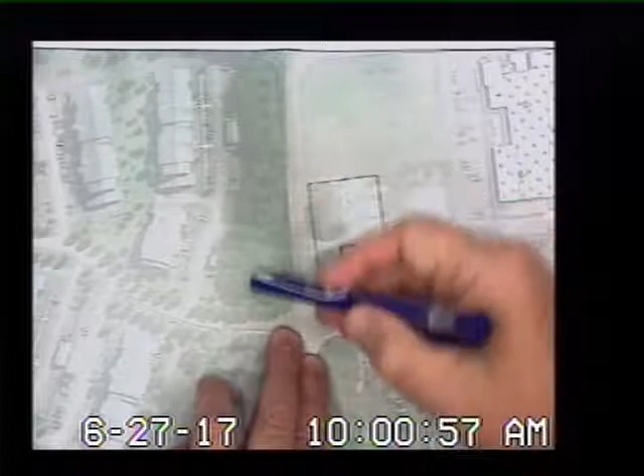This is the first time that I've heard the term creek in that area. Where is that creek located? I'm looking for a body of water, and that's why I'm repeating what you're all saying. I used the term, and I'm from Indiana. Well, I think three of you used the term, I'm sorry. Here's our site. So there is a ditch, swale, creek, some kind of water flow in this wooded area here next to Madison Park Place. By looking on the quad map, it's not a defined creek, but it actually goes to South Fork. It's an unnamed tributary of South Fork, if you want to call it that.

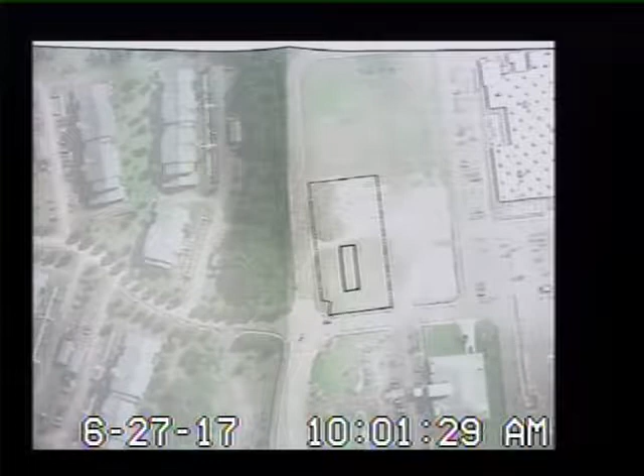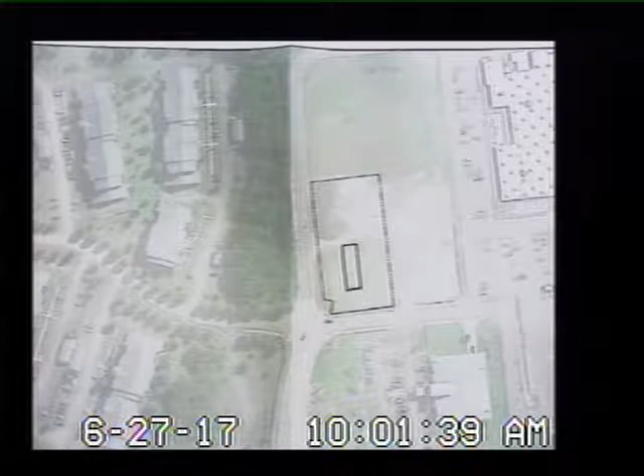Okay, I understand now what you're saying. It's just a dry drainage area through that area, okay? Right. I live in the area, that's why. And I don't know if water stays in there or not. No. That's where the existing drainage system goes for those roads now. Well, I was looking for a body of water. It's not a body of water. I apologize if I misspoke about that. All right, anything else, Ms. Crosby? That's it. Mr. McWilliams? Mr. Chairman, question for Mr. Urban.

Based on what's been presented and what we've seen this morning, is it your opinion that the signage on the site meets our existing sign ordinance? I'm not talking about program for signs. I'm talking about our existing sign ordinance. I don't know that. Brooke typically is the one that does all the signs. What they showed you were samples of the signs. They weren't asking you to approve the signs, so Brooke would then have to work with them.

I think we talked to them about whether or not they can meet the requirements, and they did not apply for a program for signs. You can ask the applicant if he has a better understanding. Same question to the applicant? We will meet whatever your sign guideline is. We will use Taco Bell's prototypical signs that Clint showed you, and if it needs to be 90 square foot, 80 square foot, we will make that work. We think the height meets your guidelines. It's 25 foot. I think you allow 30 foot if I remember right. So I think the signage, okay.

Will Brooke be running herd on that, so if we get into that situation where we need that program of signs, it'll be back? Yeah, I'm going to recommend that's a binding element, and assuming that they won't come back for a program for signs, that they're aware of what our sign regulations are, and they'll have to submit their sign package simply to meet Section 290 of our regulations. That'll take care of it, thank you. Yeah, we're agreeable to that. All right, any other questions before we move on to the next phase? Seeing none, we didn't have anybody testifying in opposition, so we'll move down to Mr. Applegate, final statement.